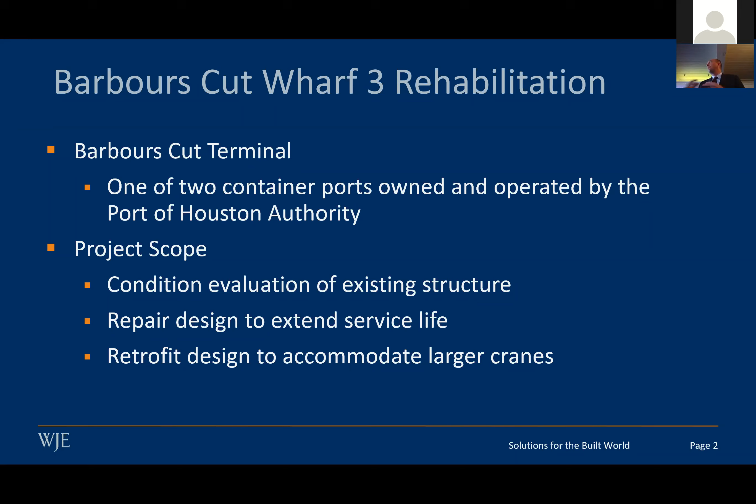Barbours Cut Terminal, as Scott mentioned, is one of the container ports operated by the Port of Houston Authority, and our scope for the project was purely structural. I'll figure out how many structural engineers we have in here—raise your hand, okay, we have a few. So I'll be talking a lot about structural topics, but I'll try to open it up to other things too, so feel free to reach out with questions. Our scope was to do an assessment, then pair that with service life modeling to figure out what repair strategies were most appropriate for the structure. The big part I was involved in was the retrofit design to handle these bigger loads and cranes. The Port of Houston's been around for a really long time.

It started out where things were barged in Galveston and then taken along the Buffalo Bayou ship channel. A couple hurricanes knocked out Galveston infrastructure such that they really wanted to dredge that bayou, and that's the ship channel that we see today. So all that was done in the very early 1900s.

Some of the structure that Port of Houston maintains today is from that original 1900s, 1910s construction. City Docks 1 and 2 at the Turning Basin are some examples of structures that have been around. Today, the Port of Houston rates as the busiest US port in terms of foreign tonnage and overall tonnage.

This was just recently - I was looking up, because a couple of years ago they were second. So a lot of resources have put them to the top. In terms of container ports, they're a little bit lower, I think they rate as number 5 or number 6.

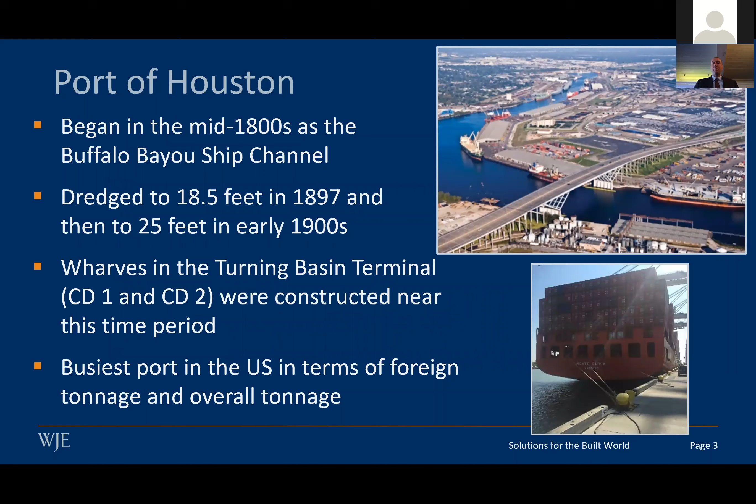But it's something that is increasing as they expand their capabilities. So this is just a map of Houston, Galveston, and the Port of Houston infrastructure ranges over that entire box that you see there.

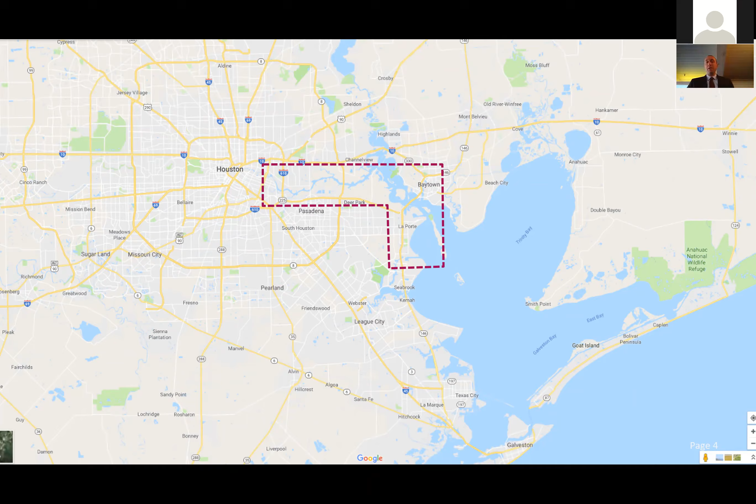So if we zoom in a little bit more, they have their turning basin, which is one of those early 1900s near the downtown region of Houston, all the way to the container ports that you see on the right-hand side. They do everything between cargo, containers, as well as liquid and bulk. I think liquid accounts for most of the tonnage of material coming through, but containers is increasing recently.

So I'm going to be talking about this area of Barbours Cut. Barbours Cut features 6 terminals, each about 1,000 feet long, and they were constructed between the 1970s and the late 1990s.

Barbours Cut 3 is going to be my focus. We were involved a little bit on 1 and 2 - Jacobs was, I think, the lead designer at that point. But my project I'm going to talk about today is 3. This is part of Port of Houston's redevelopment of this entire wharf to handle those bigger ships coming through the Panama Canal, those so-called Panamax ships.

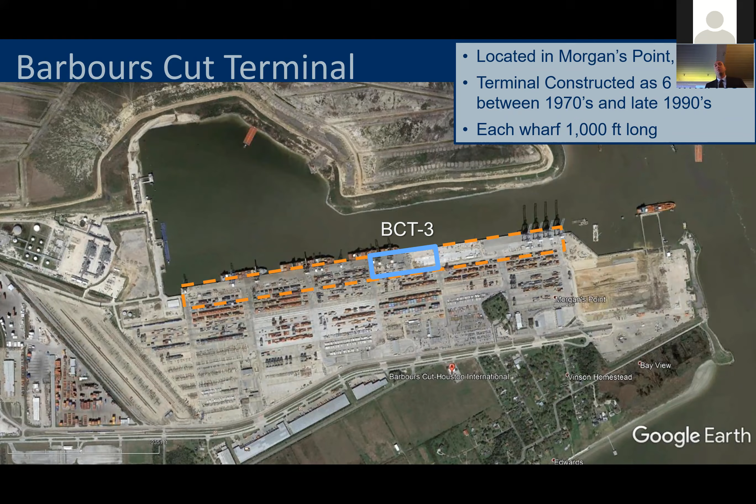Barbours Cut 3, constructed 1978, 1980s, and each features 3 different units, each of them 333 feet long. So there's an expansion joint in between each unit to account for that total berth length of 1,000 feet.

The original structures were designed for a variety of loads. They have the gantry cranes that you see in that bottom picture. The gantry crane back then was 50 feet gauge, so that just means the distance between the crane rails, and a variety of self-weights, gravity self-weights that we're going to talk about.

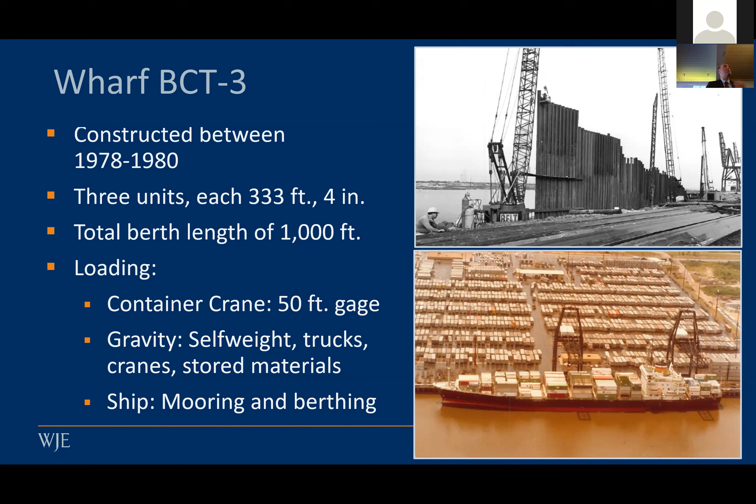For live loads, they had an 800 PSF live load, so much bigger than anything I've designed for previously, to account for the stored materials on the structure. And then going into mooring and berthing - that's something that was new to me for this structure that accounts for some pretty large loads as well.

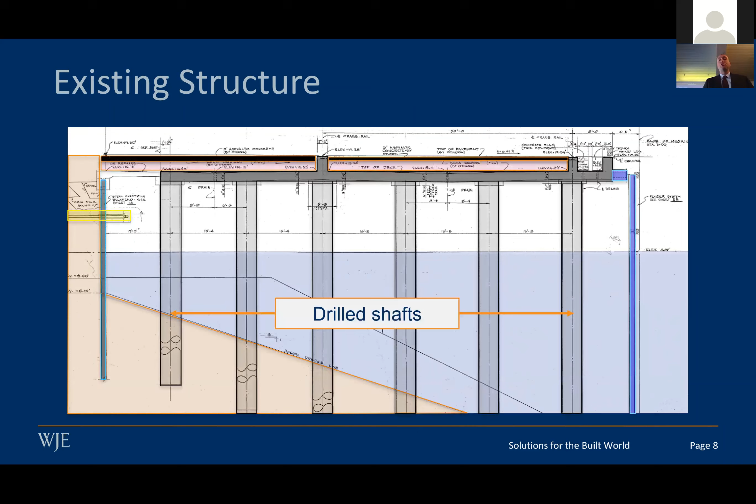So the existing structure is actually pretty simple. It features drilled shafts that support a flat slab on drop panels, so very simple two-way behavior. Then on top of that slab, you have a fill with a pavement, and that helps redistribute the load for these large, heavy loads that we're talking about.

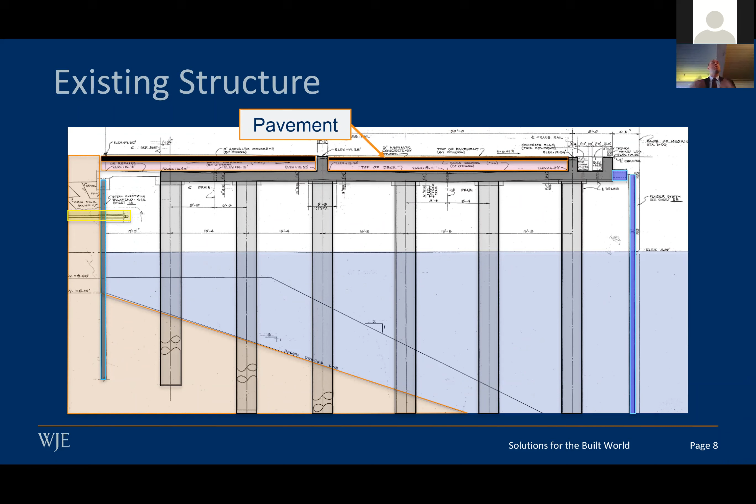Along the front side of the wharf is the bollards, devices that help hold the ship in place due to wave action and wind action, and then a fender system to protect the existing structure as the ship is coming in to dock. Along the backside, there's a bulkhead, tieback, and wale beam to just hold back the soil. So overall, pretty simple structure.

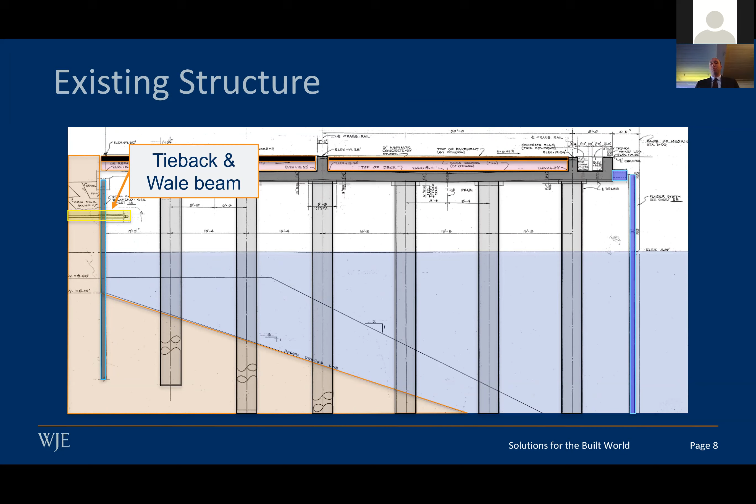And then for the original, they had crane beams highlighted here that are 50 feet apart. So why is the Port of Houston interested in rehabilitating the structure? Well, part of it is just due to its age - it's been there for over about 40 years, and it's in the Gulf Coast.

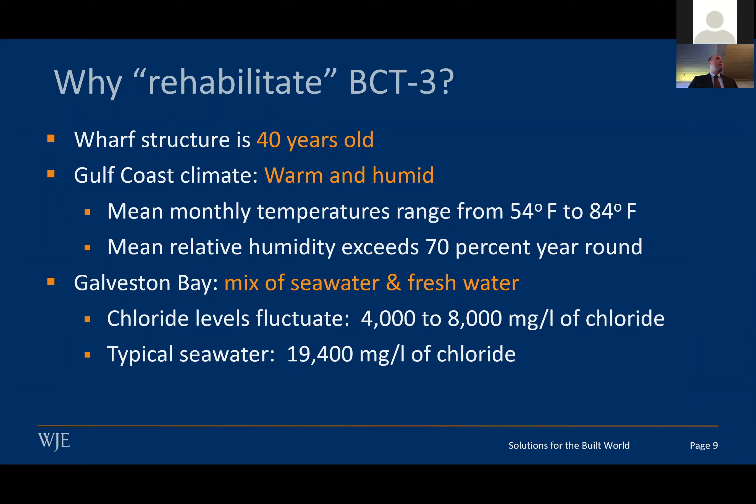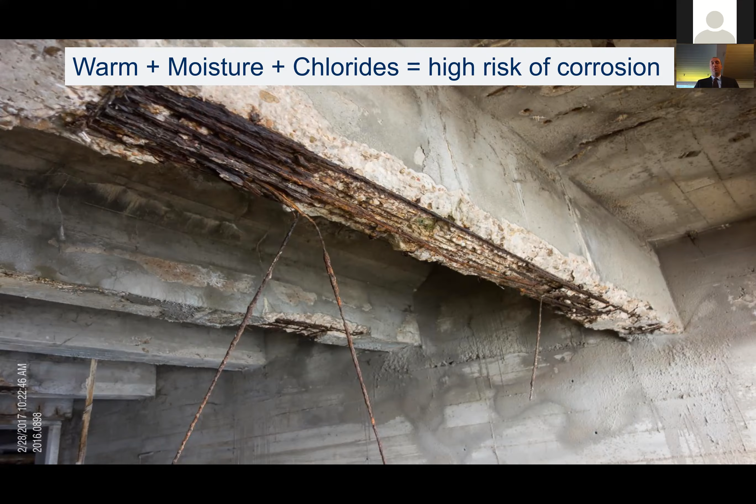We all hopefully have been to Houston and know how humid and hot it is. Well, those combined with the chlorides that are in the water combine for the perfect opportunity for corrosion. This is a picture from another structure at the Port of Houston that's seeing some corrosion of the bottom reinforcing bars. All that is a concern for extending the life another 50 years for the structure. And then the other bit that Scott highlighted was just the expansion of the Panama Canal.

This is where a lot of structural design went into figuring out the best ways to rehabilitate it. This whole project is just a continuation of the work done on 1 and 2, but here the port was interested in defining a service life for 50 years.

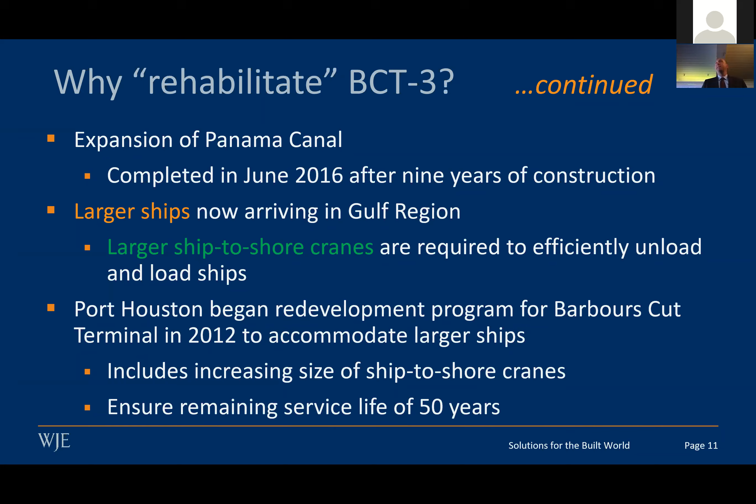The design team for Barbours Cut 3 featured BGE, who was the lead civil designer and prime for this firm, handling all the utility, water, and some redevelopment occurring in the container area behind the wharf. We led the structural design and retrofit, and worked quite a bit with Lymon C. Reese on developing the geotechnical aspects of this project.

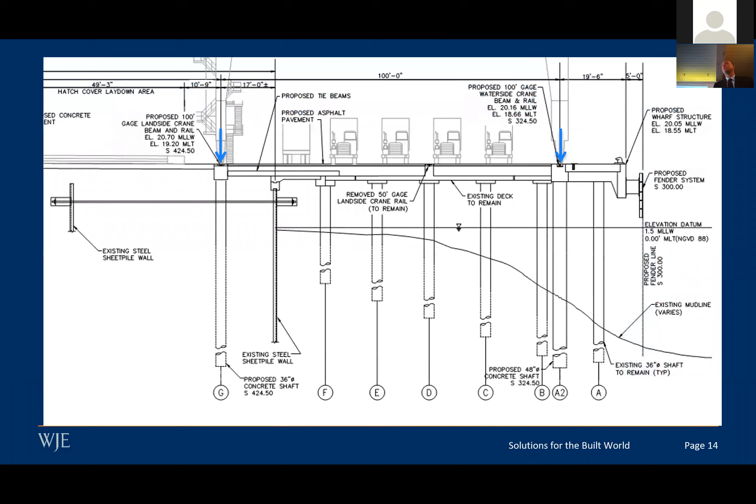We're relying on new drilled shafts that directly support the crane rail, but also integrating that new structure with some of the existing structure. So you have the A grid line, an existing drilled shaft connected into a new crane deck beam, and on the backside a connection to existing structure as well - much bigger loads, 100-foot crane gauge, and a design criteria of 50 years.

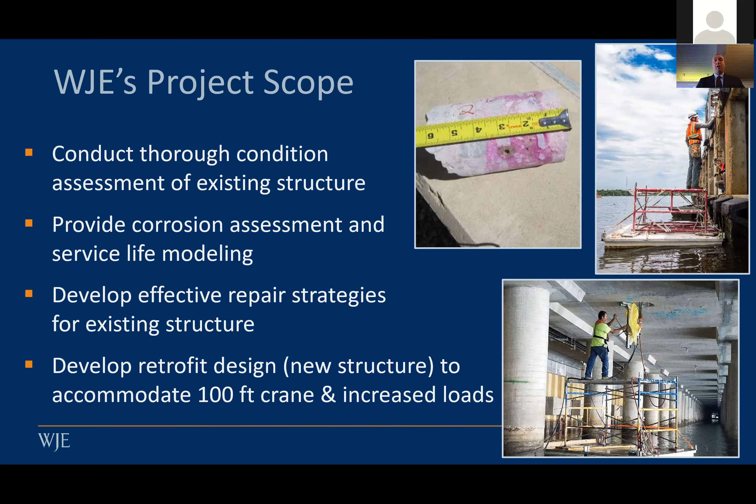So our scope, to summarize again, was to assess the structure, figure out if corrosion has been occurring, and if so how to mitigate it, then do some service life modeling to figure out the best retrofit opportunities, and design for the new structure.

I want to talk first about the existing wharf and what we observed. We did a 100% visual assessment of the structure, and because it's in water, we were in boats doing that assessment. We used a lot of non-destructive and destructive techniques to evaluate both the corrosion and any inherent structural concerns or defects in the concrete.

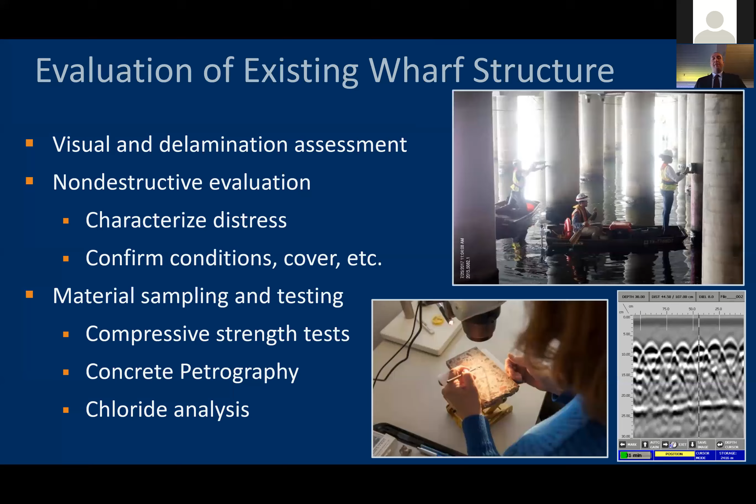That's why we utilized chloride analysis, concrete petrographic analysis, and compressive strength testing. This is us doing our visual survey, moving along. There's only one area you can walk on along the backside of the wharf, where the bulkhead is, as seen on the right-hand side of that picture. Otherwise, the majority of the wharf you can only see from boats.

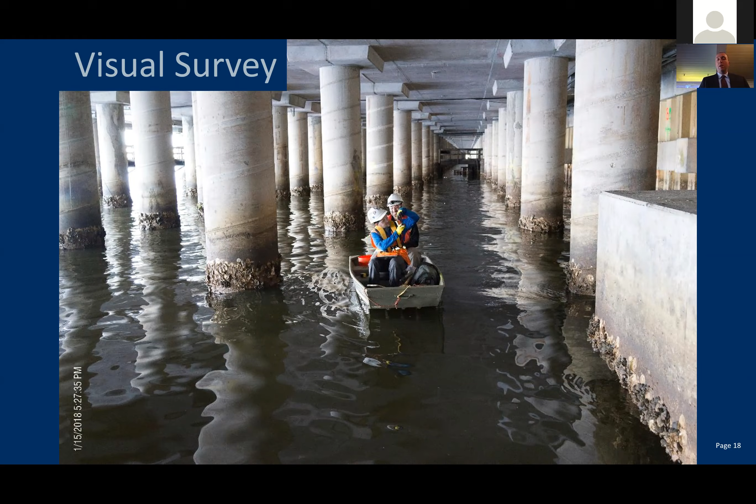In addition to the visual survey, we did half-cell potential, which gives an indication of underlying corrosion that may be occurring, characterized as low, medium, or high risk. This is a non-destructive technique useful where there may not be indications of other distress.

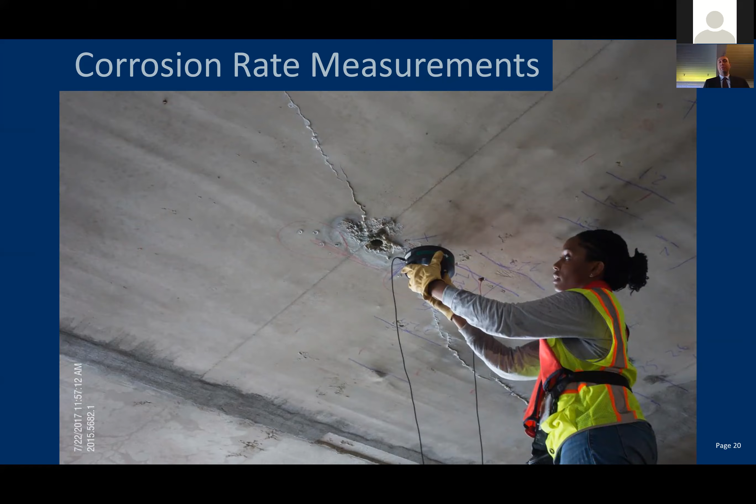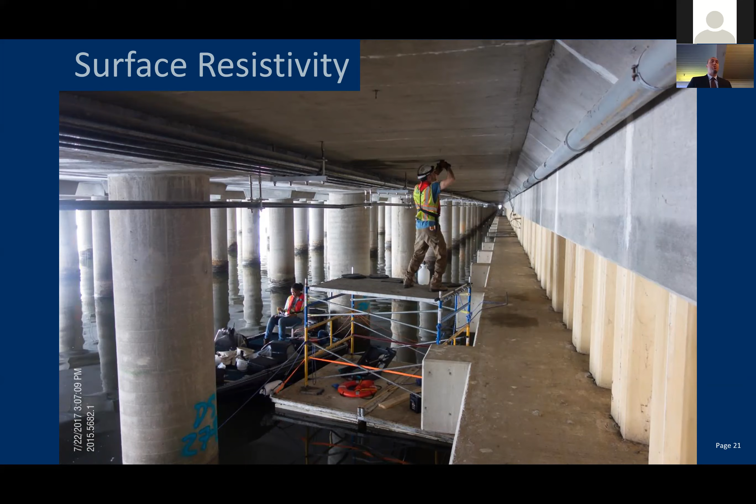We also did corrosion rate measurements to understand how it correlated with our service life models, done at various elements throughout the structure. Another technique is surface resistivity, which indicates the permeability of chloride ions, giving an indication of how good the original concrete construction was. In addition, we used GPR to do our cover depth measurements.

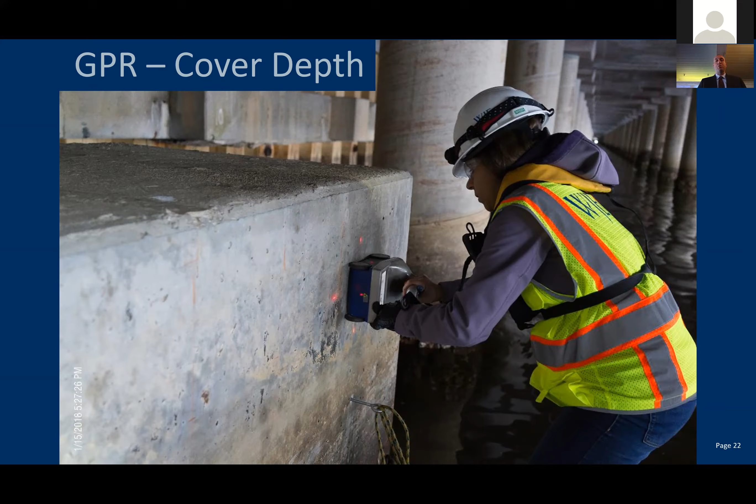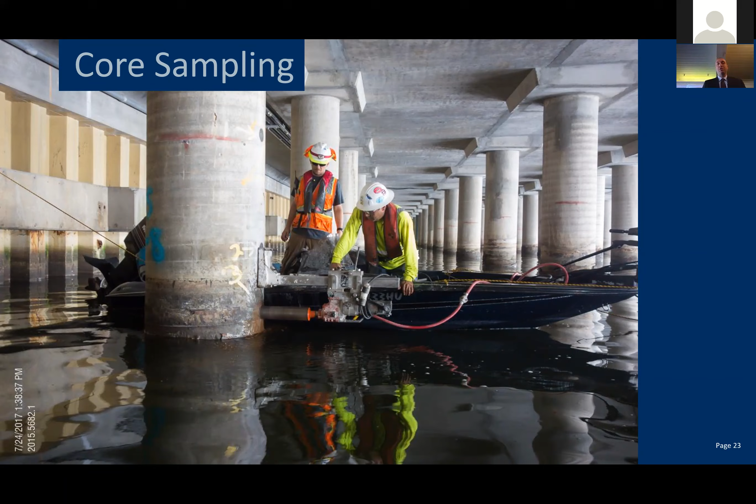There's quite a bit needed for the service life modeling, including incorporation of the actual cover depth. We had to use unique techniques to capture cores - extending over the boat and also using scaffolding to get the cores so they don't drop into the water.

To summarize what we saw: the deck had a little bit of cracking, but it's well above the water level so it doesn't see the same exposure, and all our NDE indications showed low corrosion risk. We had a little bit of efflorescence, but not too much. But going down lower towards the water line, we saw a lot more corrosion damage and a lot more potential risk of corrosion.

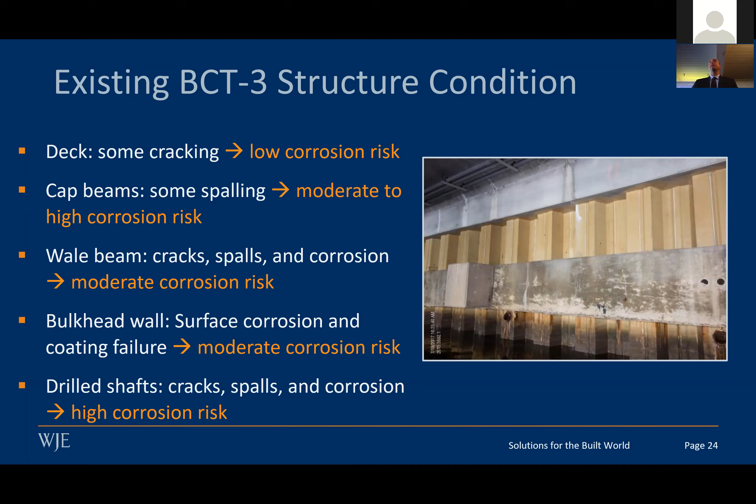The wale beam, as you see in this picture, there was corrosion. I have a better picture later on, but beyond that, the bulkhead wall - these are all within the splash zone and see a lot of wetting and drying. And then finally, the drilled shafts, you can see the spall that was observed, a lot of risk for corrosion. Being able to take those measurements, take those readings, and really do something with it was where the

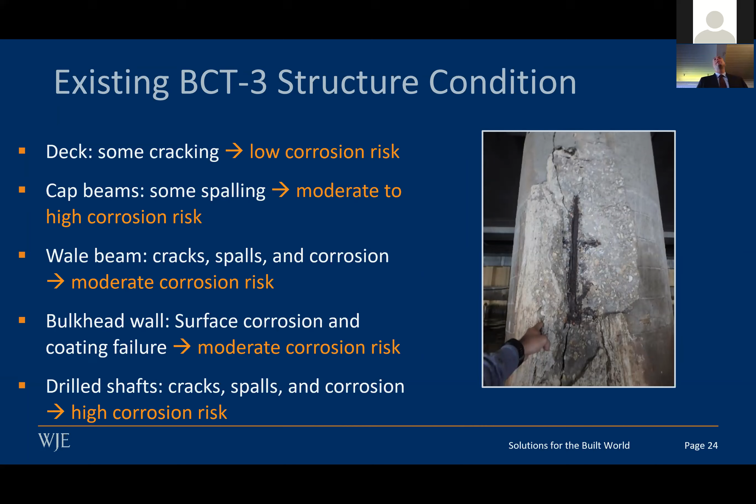service life modeling came in. This is to help us refine what elements needed the repair and which elements were okay as they were. We used the FIB Bulletin 34 for our evaluation of the service life model. It's a probabilistic approach that uses your data that you capture in the field - your cover measurements, your chloride diffusion rates, your chloride profiles - and then extrapolates that to predict the service life.

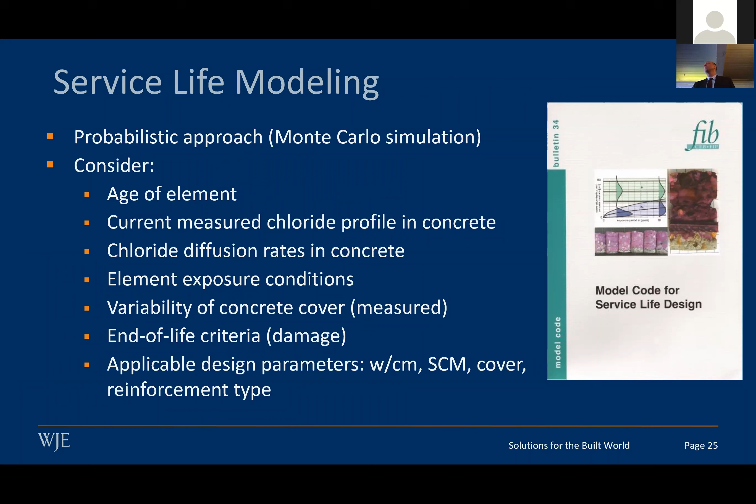Part of doing those calculations, you have to define what end of life actually means. We had to work with the Port of Houston to see how much corrosion, section loss were they comfortable with to require later repairs. So this is just some of the data that we collected while we were doing this

assessment. These are the chloride profiles for different cores with depth. You can see that in the tidal zone, you're getting high values right at the surface, which is expected because you get the water and splashing from the chlorides. As you go deeper, that concentration is going down. We fit curves to represent that so we could use it for our models, just because it's a probabilistic approach that needs an actual number as opposed to a bunch of data points. So these are some of the curves that we used.

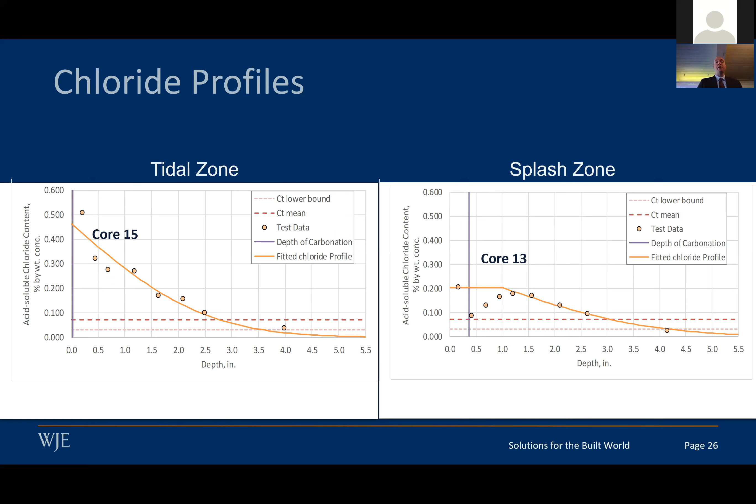We also defined different exposure zones on the drilled shaft - submerged, tidal, splash, and atmospheric. You can see how the chloride profile levels kind of varied with its exposure zone. In the tidal and splash zone, we expect to see the highest, which is what the data indicated as well.

where we could then go and estimate our remaining service life, and look at where we are today and where we'll be in 50 years, to see which elements require mitigation, repairs, and which ones can go for another 50 years.

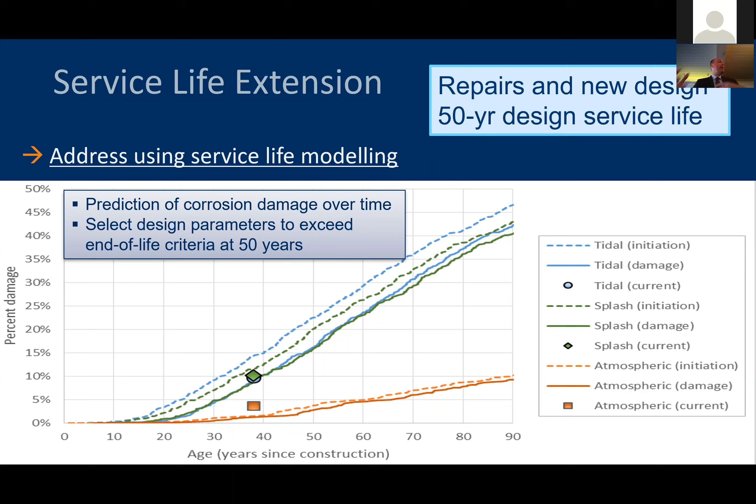You can see from this curve, these are looking at existing elements. Those orange lines represent the atmospheric zone, and going 50 years into the future, it's going to be less than 10% damage. So that's an example of something that doesn't really need to be repaired, whereas the things in the tidal and splash zones will be well above that, and currently are, based off the corrosion and damage that we were already seeing. So we were using the service life model, using our field data to calibrate our models, and then estimate forward.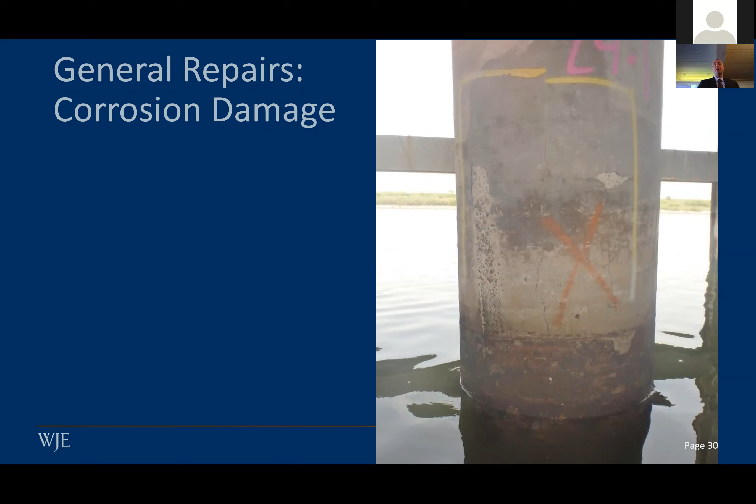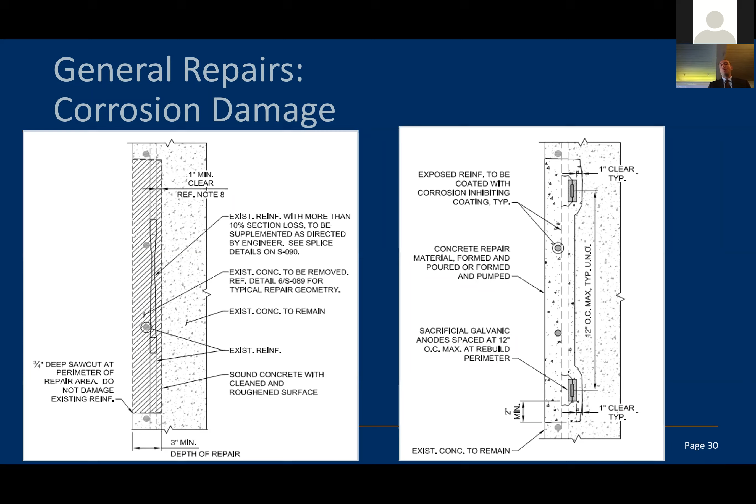We used a typical partial depth repair. This is something you might see in ICRI or other ACI documents about how to do it, but it involves demoing out all the unsound concrete, getting behind the bar, cleaning the bar, and then putting some corrosion inhibiting material on the bar. In this case, we're also going to install some galvanic anodes to mitigate future corrosion.

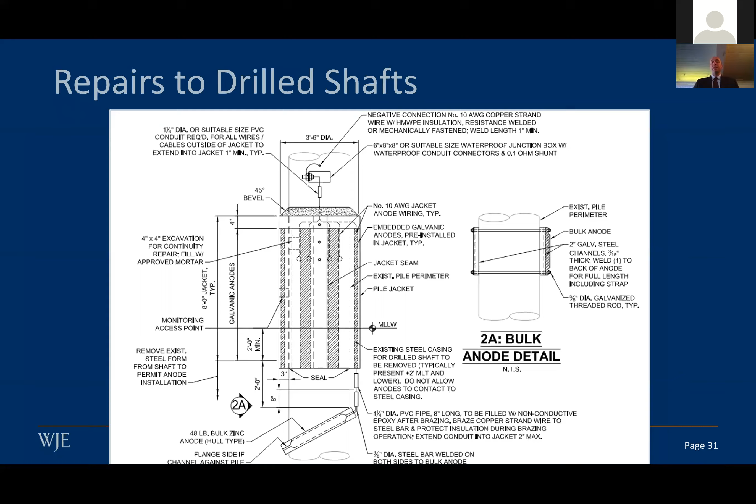So those are a way of providing localized corrosion protection for the repair so that they can last longer. Where there was more significant damage, such as those spalls that we had a couple pictures of, instead of just doing local repairs, we also wrapped the concrete with these cathodic protection jackets. These jackets feature a bigger bulk anode kind of towards the bottom, and those provide cathodic protection such that the zinc gets consumed as opposed to the corrosion occurring in the reinforcing bar. It's a way of ensuring that you last the 50 years that you want to, and you just have to design all those features together with your repairs.

This is just an example of what that looks like. The jacket is extended 3 to 5 feet above the water just to represent that splash and tidal zone that's the most critical for the drilled shafts.

This is a picture of the bulkhead wale beam, and this is where we saw pretty significant deterioration in that bottom mat of steel. You can see that crack, delamination that's occurring there.

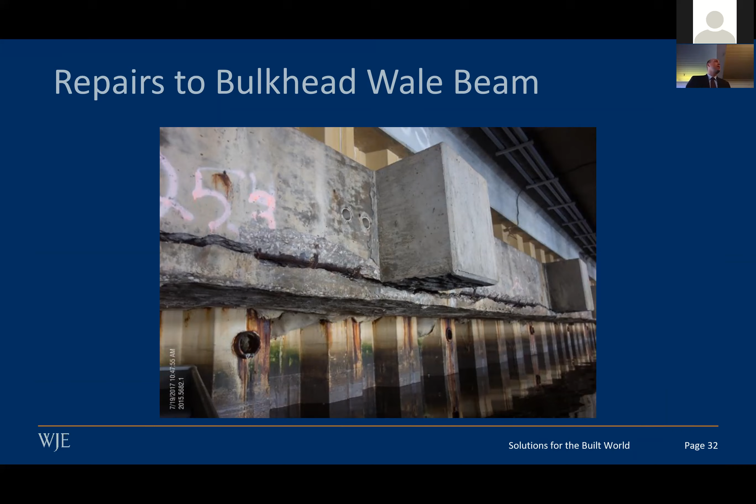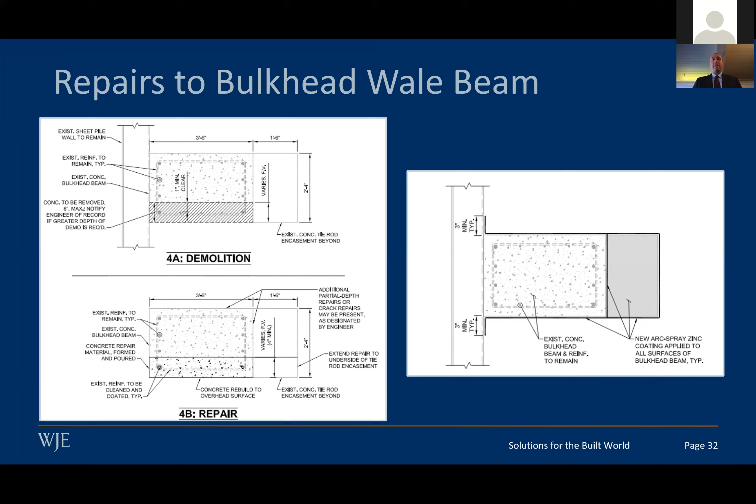As a result, we did the concrete repair that we talked about. That's what the pictures on the left are, removing that unsound concrete and casting it back. But to provide further cathodic protection, we detailed a zinc sprayed applied coating to be applied to it. The zinc gets consumed as chlorides penetrate rather than the steel itself, so this is another mechanism of providing long-term repair.

So now that we've talked about the existing structure, I want to get into what I'm most excited about, which is the rehabilitation design - the strengthening aspect of the project. This is where we installed, or designed, the new orange elements that you see there: the crane beams, the frontal beam where those fenders and bollards are located, and then some connecting pieces, the deck beams and tie beams.

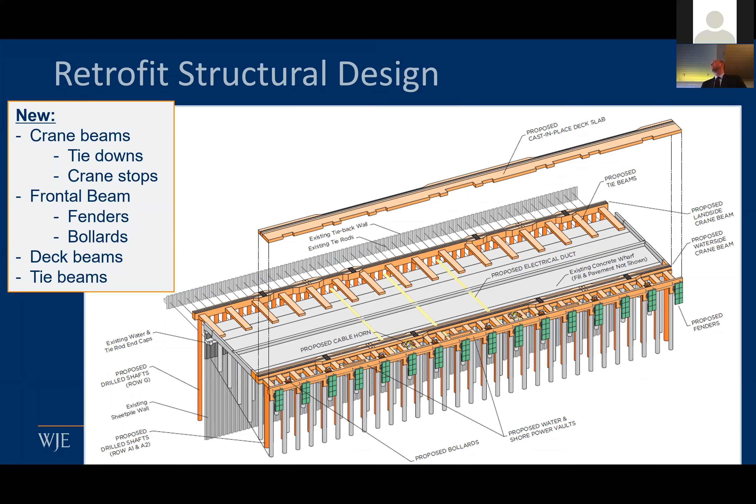Just talking about our loads first, to get a sense of how big this project is - we had live loads of 800 PSF. We had HS 25 vehicles for 5 lanes over the width of the wharf, so it's very similar to a bridge in that sense. And all these loads are moving - you have container lift trucks and cranes that can move anywhere on the wharf.

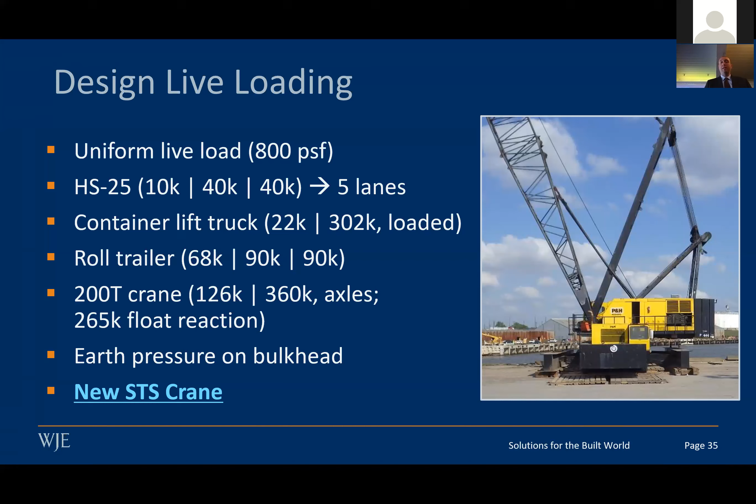Does anybody want to guess what your total crane load might be? A lot? Yeah, the big cranes. Just want to throw out a number - anybody? 200,000 over here, 2,000 kips. 2,000 megapascals - megapascals, I can't do that conversion. So you're close, it's in the range.

So 4.7 million pounds over that 80 feet - quite large. The individual wheel loads are about 300 kips per wheel, and this can move anywhere along the crane rail, along the 1,000 feet of wharf. Much bigger than anything I've designed for previously.

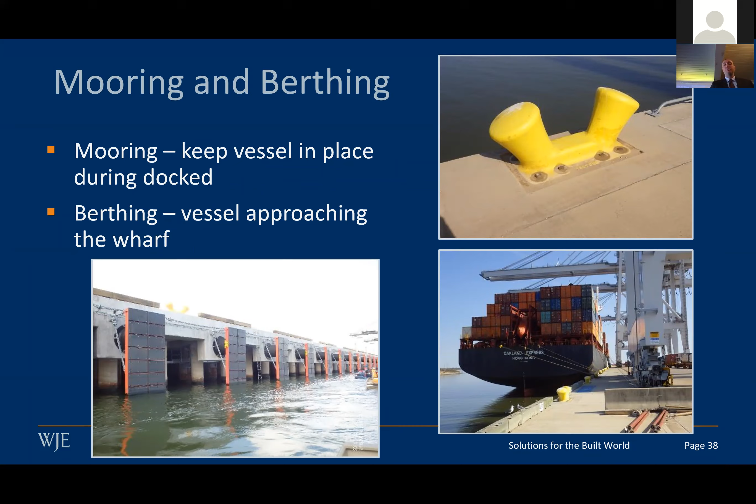In addition to all those live loads, we have mooring and berthing. The mooring loads are to keep the ship in place - they get ropes attached to these yellow bollards that you see in the pictures on the right, and as waves or wind hit the ship, it keeps it in place. Whereas the berthing is just to help protect the structure.

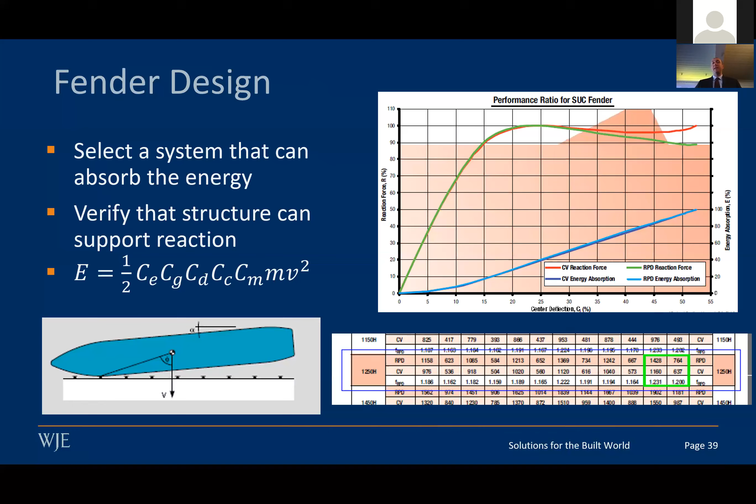The fender design, or the berthing design, is all energy based - that was something I hadn't done before. It's completely 1/2 mass times velocity squared. You define your mass, define your velocity that you're going to design for, and then you figure out the energy. There are a couple of correction factors if you're going at a slight angle or what types of waves, but that's essentially what you do to design fenders - get your energy and then figure out a fender that can support that energy. That was actually pretty straightforward.

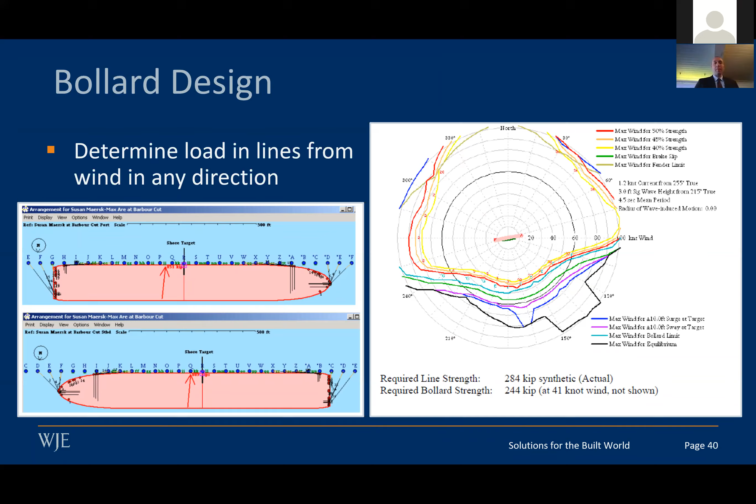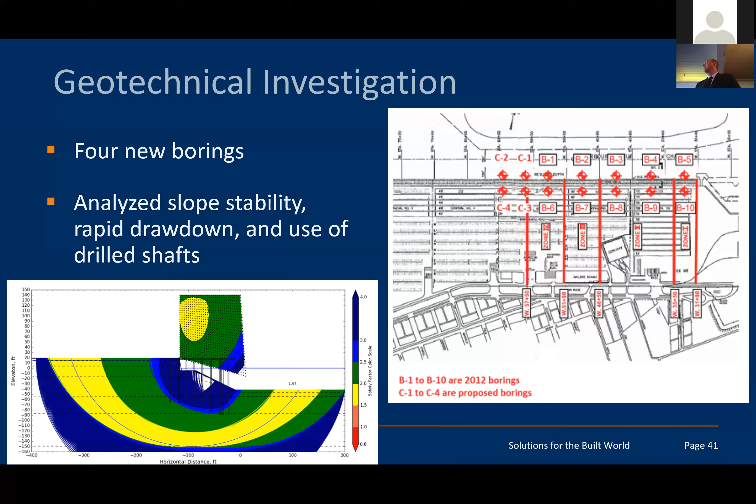Lymon C. Reese performed the geotechnical investigation. They relied on previous borings at the site and also did 4 new borings. They performed all the slope stability and rapid drawdown analysis, but they really defined the drilled shaft analysis that we used in our evaluation.

The soil in Houston at Barbours Cut is mainly clays, but it also features some silty sand regions, and all that was accounted for in how they got their axial capacities and lateral capacities.

So they gave us these designs that we could use, but they also defined some springs for soil structure interaction. Those are springs that we had to bring into our model and evaluate, but which allowed us some structural efficiency, as I'll talk about.

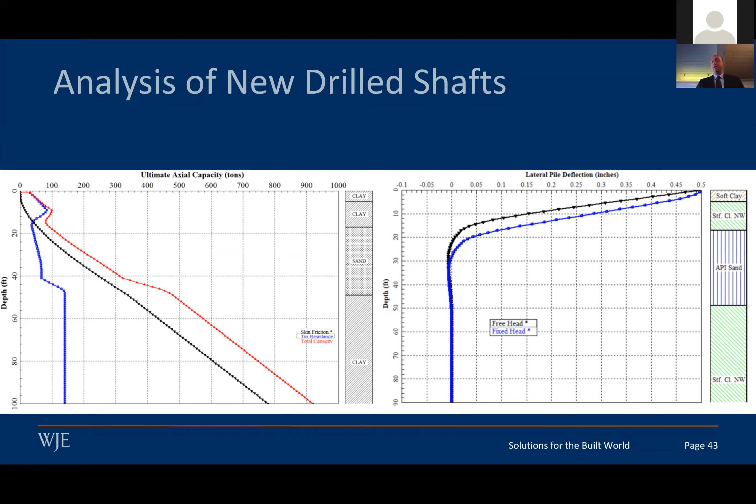The model that we created was half a unit, so half of 333 feet. We're relying on some symmetry to reduce our runtime, but it considered all the loads I talked about previously, all the live loads, mooring, berthing, crane rail loads, et cetera. But we had to incorporate those soil springs into the drilled shafts.

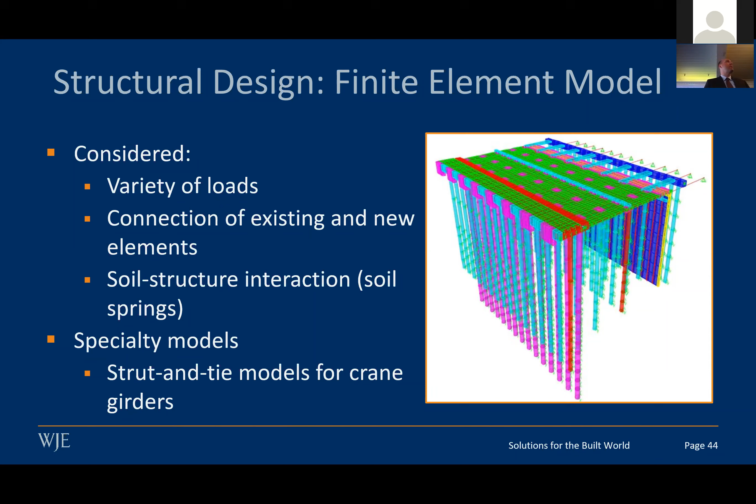And so they vary with depth and create a nonlinear problem that needs to be solved. Then we focused a little bit on how that new structure is connected to the existing structure, and the next slide is going to highlight that more. The final thing I'm going to talk about is the strut and tie models that we had to use for some of the bigger crane elements.

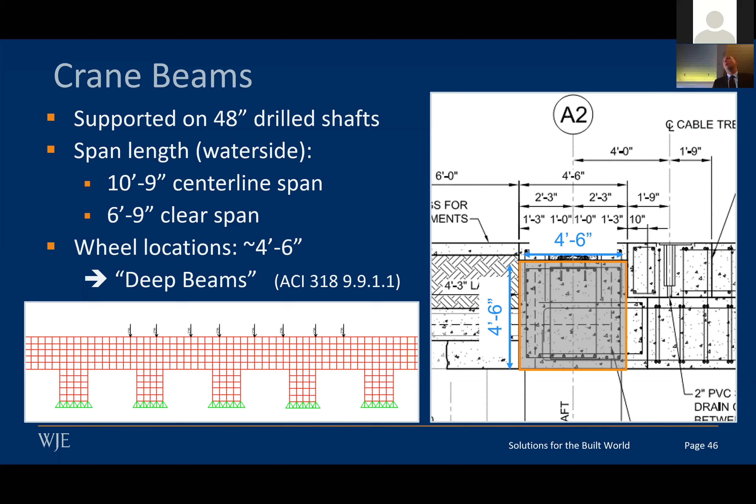The big elements that were new were the crane beams, and those waterside crane beams are 4.5 feet wide by 4.5 feet tall. They're supported on drilled shafts that are spaced about 10 feet 9 inches on center. Due to the clear span, they are defined as deep beams in ACI, and ACI would tell you, you need to consider nonlinear strain distributions for analyzing them. So no longer just simple moments and shears, it's about carrying it with, as I'll talk about, strut and tie.

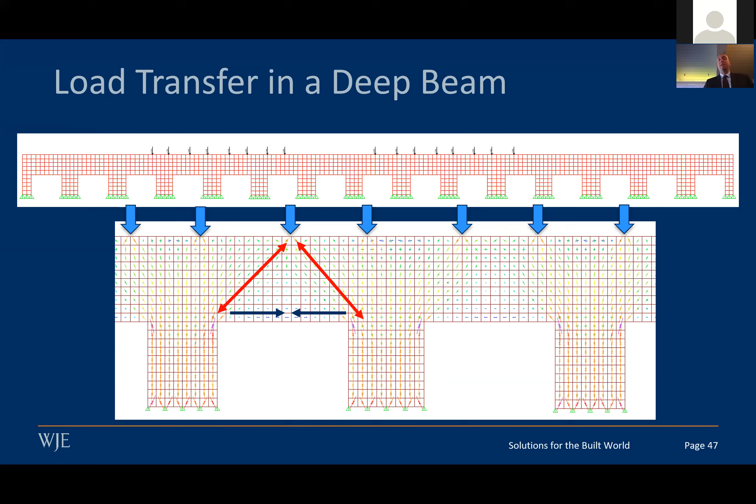This is an example of what load transfer in a deep beam might look like. If you focus in and apply a load, it's going to extend diagonally to your support locations, and so these are struts in terms of strut and tie vernacular. Then you need some tension force to kind of hold it all together so that they don't separate. The red lines typically represent your compression struts and the blue lines represent ties. This just follows what you'd expect to see in a deep beam.

One way to evaluate those is to use strut and tie modeling, where you create a truss of concrete elements, where your concrete elements are called struts, the steel elements are your ties, and your nodes are just where load concentrates. We implemented strut and tie for this particular wharf, and we got good design results, but there were some challenges that we had to overcome.

Not often are you dealing with strut and tie models where the load is moving, and so having to create multiple models to envelope those results was challenging. But it kind of highlighted a little bit about those flexible supports when we were talking about how load is shared. It also impacts the strut and tie model.

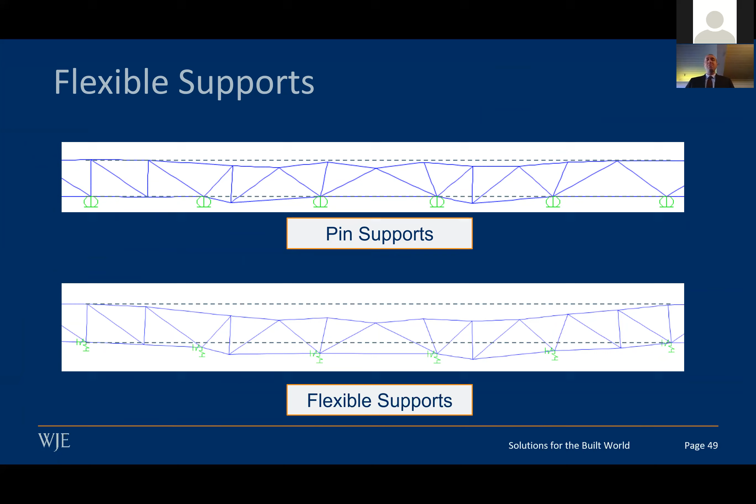So you can see here, if a strut and tie model had pin supports where everything's really fixed, it's just going to deflect in between the supports. Whereas if you add flexible supports, then things are going to globally deflect in between. Well, the outcome is that effectively increases your span length. So the crane beams need to span further and need more reinforcement. But they're no longer just statically determinate anymore because of those springs.

And so we had to be conscious of the stiffness that we chose for our chord members to make sure that we were getting realistic deflections. So we ended up using the transform section properties of a concrete beam to provide our stiffness.

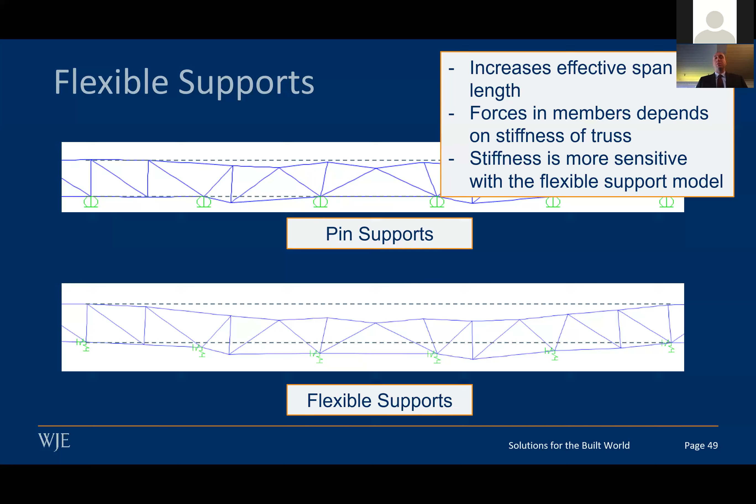And just comparing the two results, if you used pin supports and you went to flexible supports, you need twice as much steel for those flexible supports as the pin supports. Well, all in all, we designed these with number 10s top and bottom, and then had to have stirrups there for a little bit of shear, a little bit of the detailing requirements of strut and tie, as well as some torsion that gets induced from all the interactions that occur.

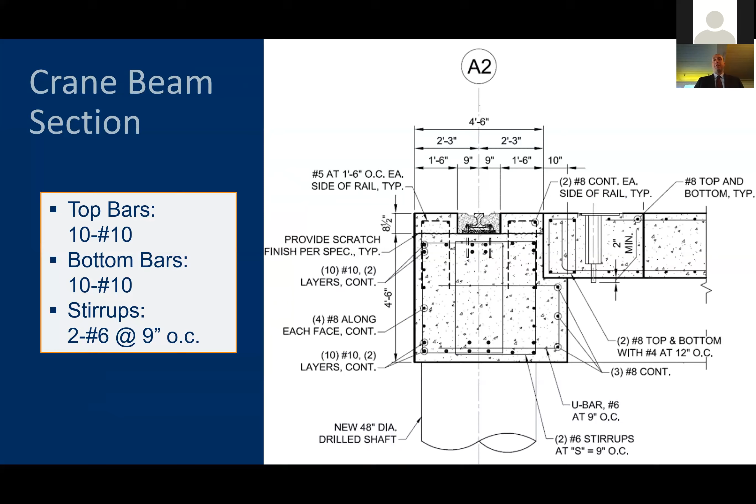Now, the other big reaction that I want to talk about is the tie downs. So previously we were talking about 300 kips per wheel load. Well, the tie down for hurricane levels is a single point load of 2.3 million pounds. And this is a load that's applied when the cranes are locked down. So anytime the wind gets above 55 miles per hour, the cranes have to go to specific locations on the wharf and get locked in.

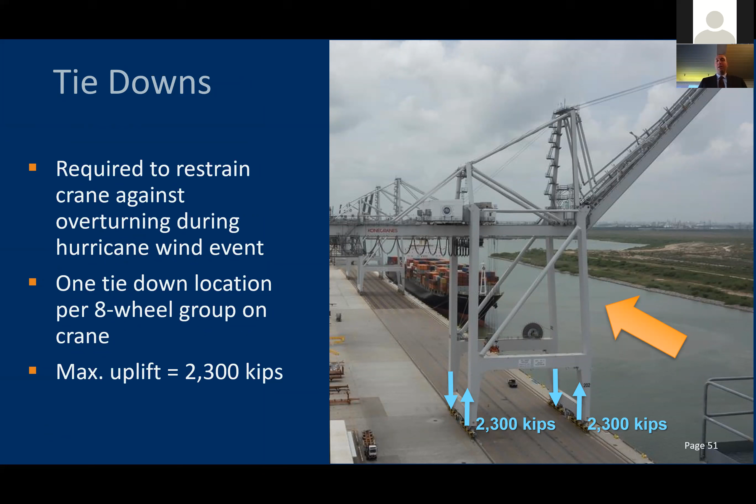Otherwise, they could potentially topple over. Otherwise, during normal operation, they're going anywhere along the length of the wharf. So each corner will see 2.3 million pounds for that 150 mile per hour wind event.

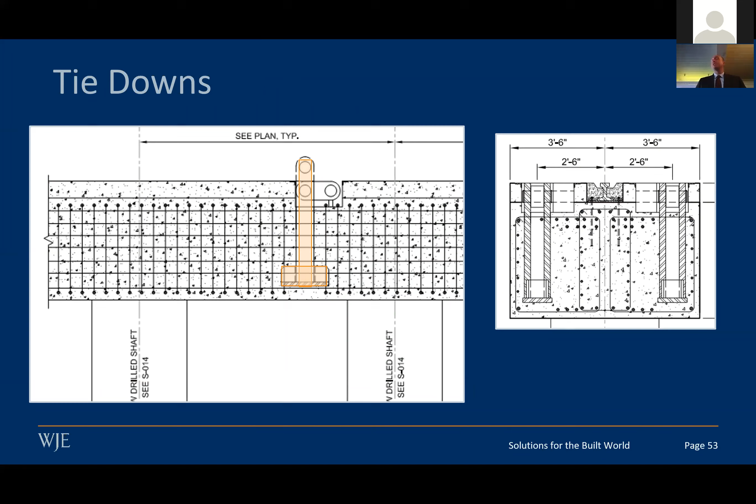Well, that creates a challenge from a strut and tie perspective. We have a picture on the left with just our elevation and our section view on the right. Imagine pulling up with 2.3 million pounds. Half of that goes to either side. Well, the first strut and tie is your typical strut and tie that takes the load to the drilled shafts.

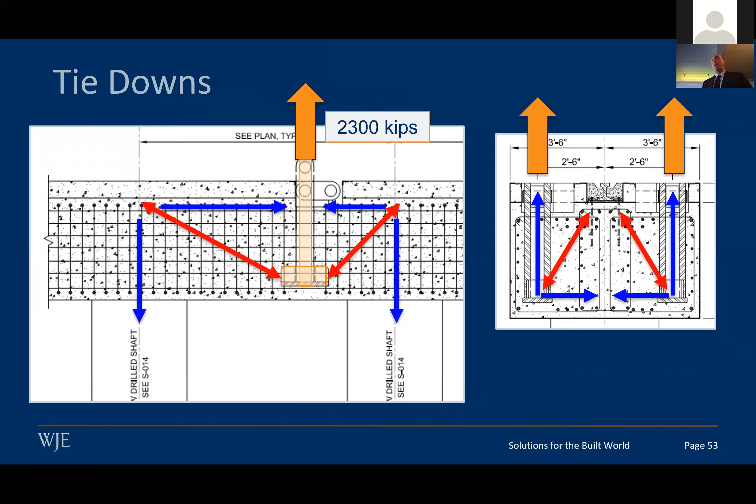But you get a second strut and tie model that needs to be considered, where you're taking load from outboard of the drilled shafts, outboard of the crane rail, and trying to bring it inward into the centroid of the section. And so what the second strut and tie model tells you is what the horizontal force is at the bottom of that section in the right-hand picture. And you can see that if you actually looked at it from 3 dimensions, we're trying to get that force that is trying to hold the section together.

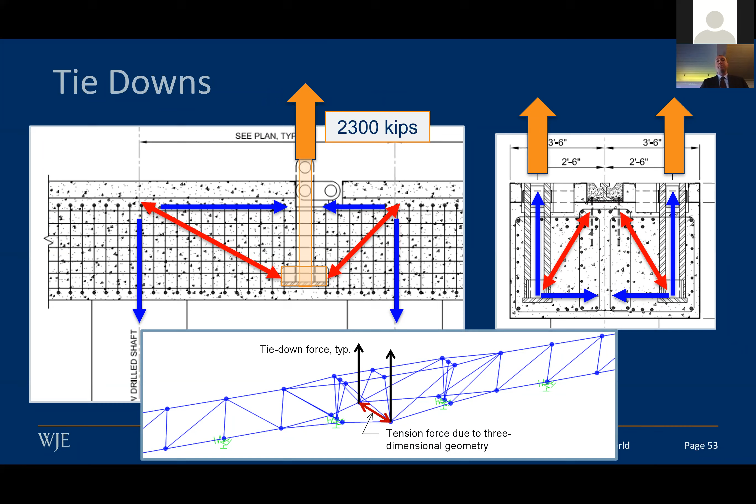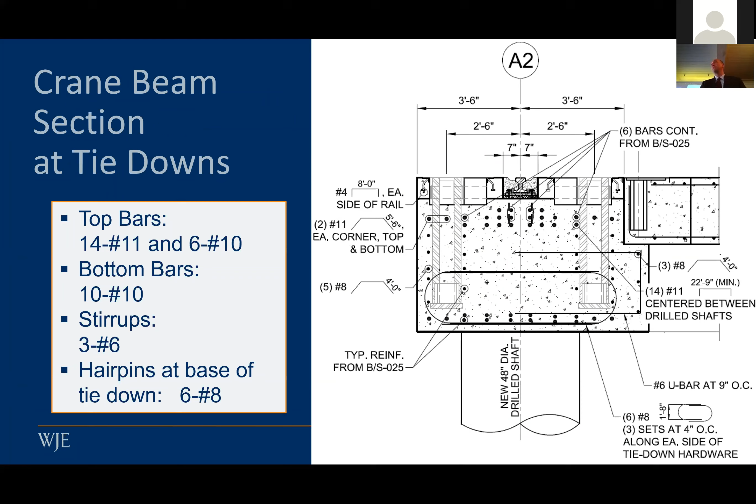Had to put a lot of steel in there, 14 number 11s, 6 number 10s along the top. But the hairpins, the 6 number 8s, 3 on either side of the tie down, is what comes from that 3-dimensional model. So a little bit of challenges. Hadn't seen any of these before, but it was very interesting to work through the different aspects of it and handle very large loads.

As you can imagine, there's a lot of steel, but there's a lot of conflict potential. And so we had to create different detailing diagrams to understand where they're going to have conflicts and put these on the drawings for the contractor so that they are aware, hey, you're going to be concerned about these candy canes, right? They're going to be an important part. But the contractor was really good with doing mock-ups early on to make sure that they got everything correct. And this has been constructed, so they did get all the steel in there without any problems.

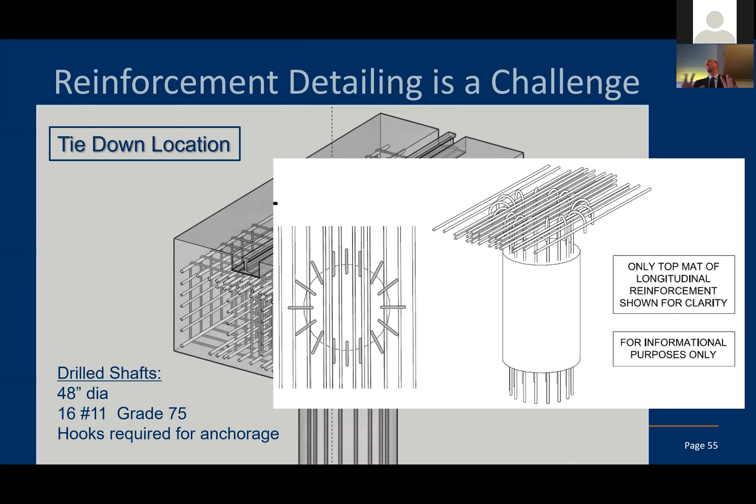The last thing I'm going to talk about, and then I'll be done, is bringing together that service life modeling discussed earlier into a corrosion protection plan. This plan was something discussed with the owner about the best techniques to design the concrete members for that 50-year service life.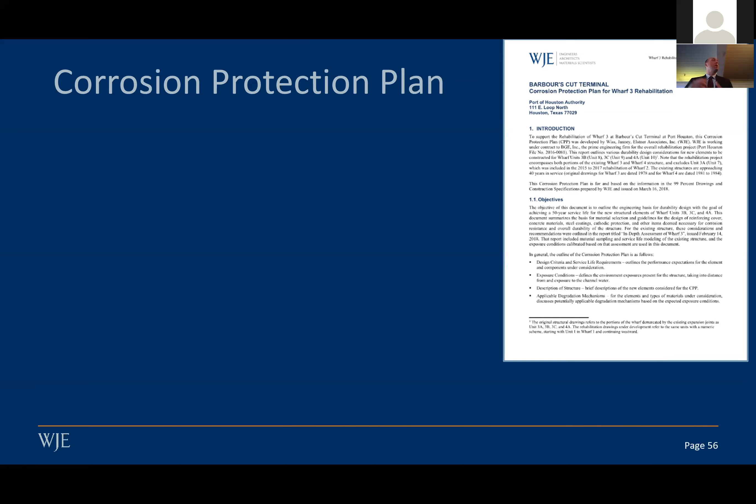Once you develop that corrosion protection plan, whether it's putting in galvanized steel or decreasing the permeability of the concrete, once they decide, it has to be incorporated into the construction documents. That's the drawings as well as the specs, requiring coordination between the people doing that and me, doing the analysis and repair drawings. It also required a lot of upfront communication with the contractor to say, this is our intent, this is what we're trying to achieve.

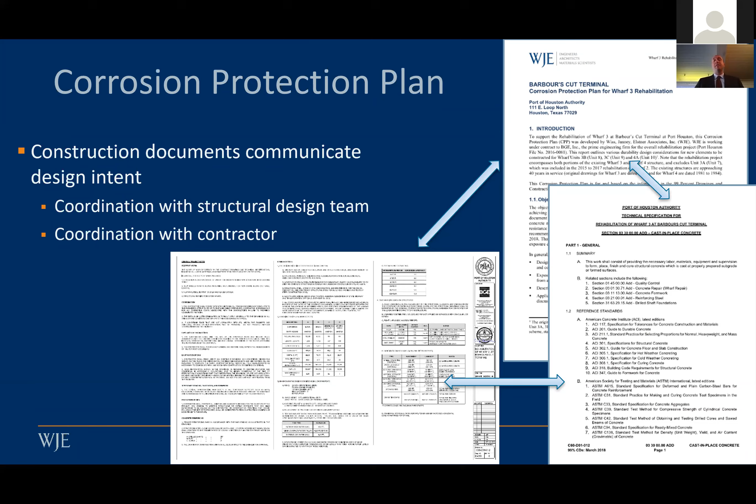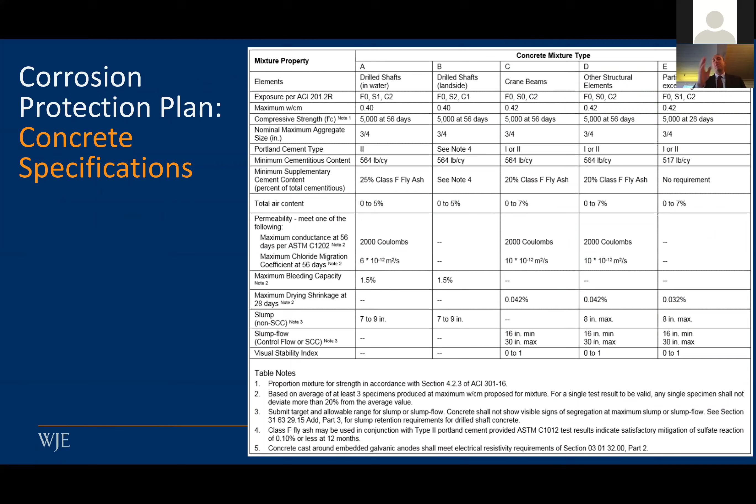Just to show how that was done, I'll highlight these concrete specs. Our concrete specs were performance specs for different elements, stating what we're trying to achieve, and how they varied with the different elements. So I'm going to highlight the drilled shafts along the water side in the water, and the concrete, just your typical crane beam.

They had slightly different water cementitious material ratios, 0.4 and 0.42, and different cement requirements because the water side crane drilled shafts are in water, so they need higher sulfate resistance. Different cementitious material and supplemental cementitious material contents.

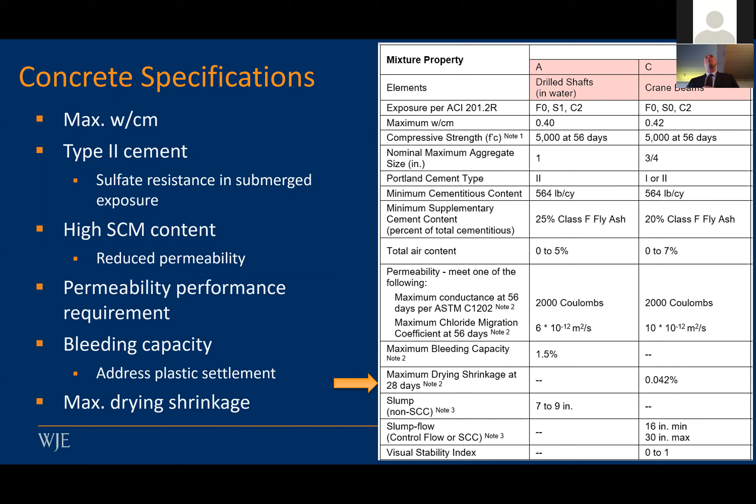We needed reduced permeability in our drilled shafts because of the exposure to chlorides, and we wanted to see that impact from test results. We also had some bleeding restrictions because of previous problems at other locations, as well as a max drying shrinkage, which was related to our service life model to ensure that 50-year service life.

So hopefully you've seen why I like this project so much, due to its scale and many intersecting elements. It required thorough upfront assessment to understand the condition of the existing 40-year-old structure, but also a lot of analysis because of such large loads and interactions, and how everything fits together once you develop those service life models and figure out the right solutions. Then it needs to be implemented in the design drawings as well.

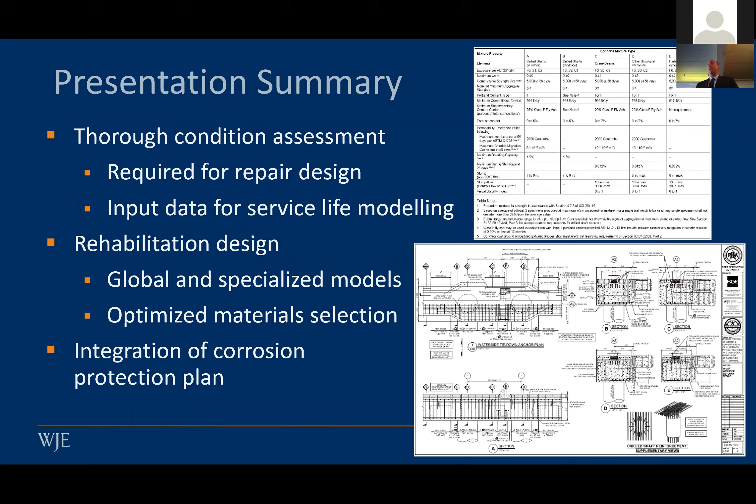So with that, I will open it up to any questions.

Yep, so it looks like you cut off the front of the pier, and then worked behind the bulkhead. Did all the load resolve into those two locations? And how did you connect it? Because it doesn't look like the spacing of these drilled shafts were the same as existing.

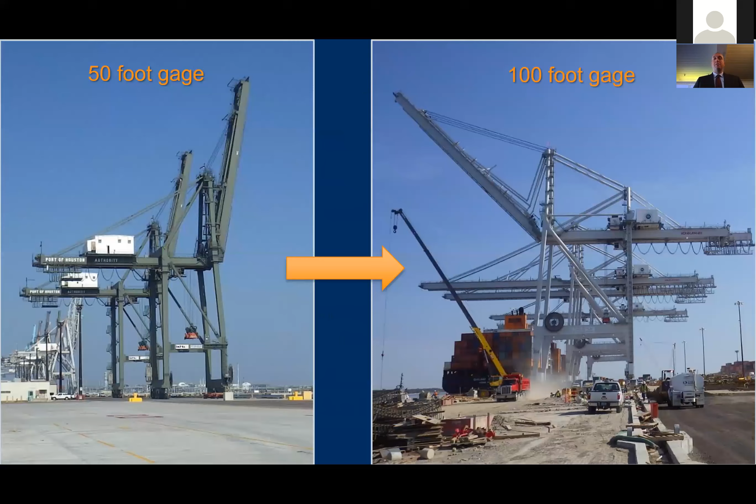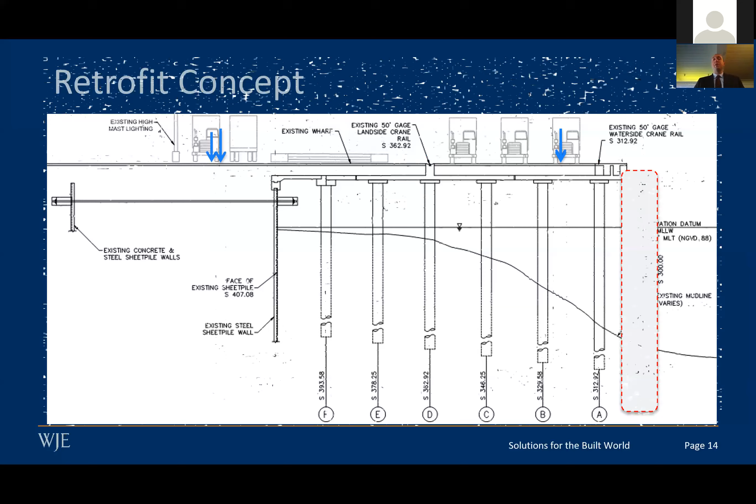So the question was related to, we cut off the drilled shafts or cut off the structure, right? Which is what we're trying to show in this picture, and all the new elements are orange. Okay, can you continue your question? So is all the loads, those large loads, resolved just into the new structure? How did you tie it into the existing?

So the question is whether all the load is going into the new structure, or if some load is going into the existing, and if so, how did we do that tie-in. Along the land side, the left side of this plot, everything is going into the new structure, and there's no water there, so they're not extending 60 feet unsupported, so those drilled shafts in general are much stiffer. Whereas on the water side, the crane beam load is actually shared between multiple elements, and that's where I was showing some slides later that showed that sharing effect.

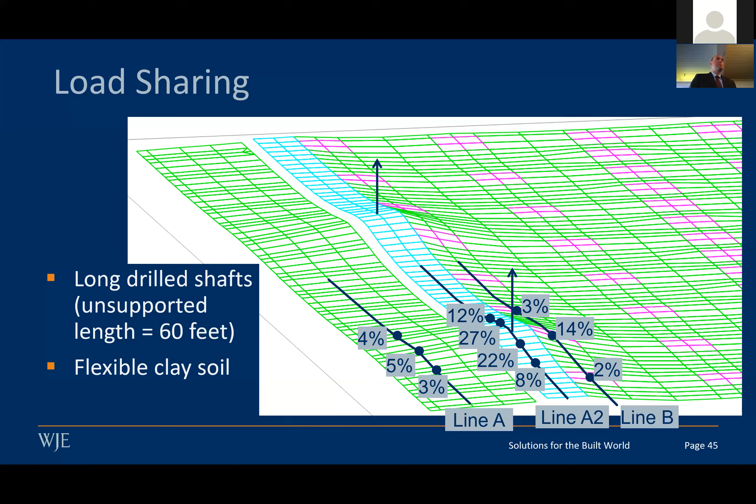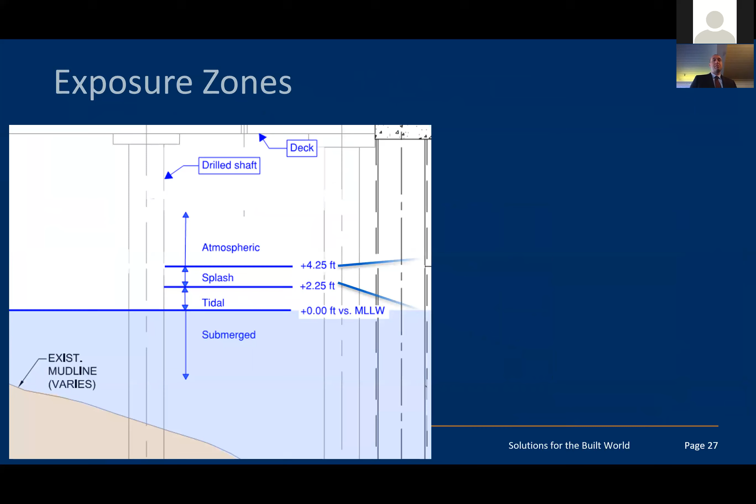I have questions kind of about the water levels as y'all were doing your design. Can you talk a little bit about that? Like, is high tide an impact here, high tide, low tide, the water level rising, storm surges, things like that? And if the deck of the structure is lifted, is it pinned under? I know you mentioned that about the cranes.

Yeah, so the question was related to the water levels and how that might have influenced the design. The high tide impacts the depth of some of the repairs, and that's shown a little bit in this area where we had to create exposure zones where we expected the tidal region to be, and then the splash region above that, because we're expecting to see higher chloride levels in those areas. So that may impact how we implement repairs, and that was considered in the design and implemented.

The storm surge question is not something that I explicitly considered. I would need to think about that a little bit more. I don't know actually what the highest value of storm surge would be, or if it would get above the deck, because these are 15 feet above normal water line, so that would be a pretty significant storm surge. I would suspect that we do have enough tension that the deck's not just going to lift off, especially in the areas where we have the tie downs. We have significant tension there, but I don't suspect it elsewhere either, just because you have the deck, you have the fill on top of the deck, and you have pavement on top of that.